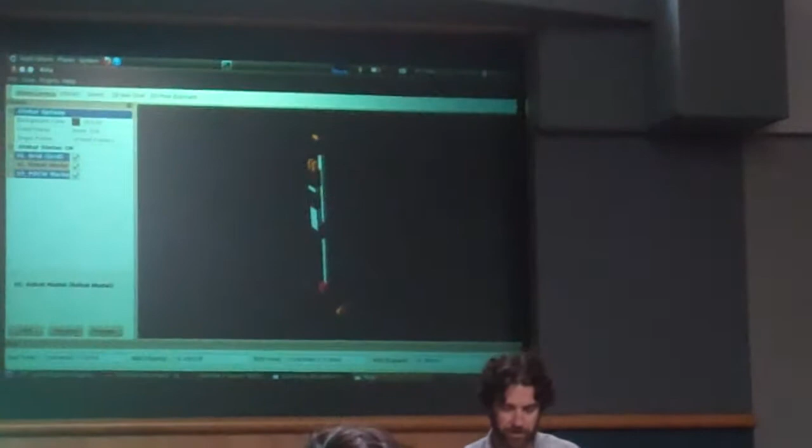So this is the actual wizard. We have our ornery turtle here. And so the first thing you'll see is we have easy and advanced. The advanced allows you to twiddle a lot more things, to set configuration at a much finer level, but today we're only going to go through the easy mode. If anybody's interested in what the advanced mode does, then I'm happy to talk about that offline.

So in the easy mode, I have to do one thing essentially, which is to say, what am I trying to navigate? What is the arm on this robot? Or what are the set of joints on this robot that I'm actually going to be trying to execute plans for? And generally speaking, for a mobile manipulator, this is going to come in the form of a kinematic chain. So the set of links and joints which is going to allow me to get my end effector somewhere in the world.

So I'm going to add a group kinematic chain here. We have our helpful little diagram describing the different things I'm going to set. This view actually allows me to navigate this tree structure of my robot. And I do need to know a little bit about what a kinematic chain is and why I'm setting this up, and in this case, we're not going to focus on that. I do know the right things to specify for this robot. I give my chain a name, and then I say accept.

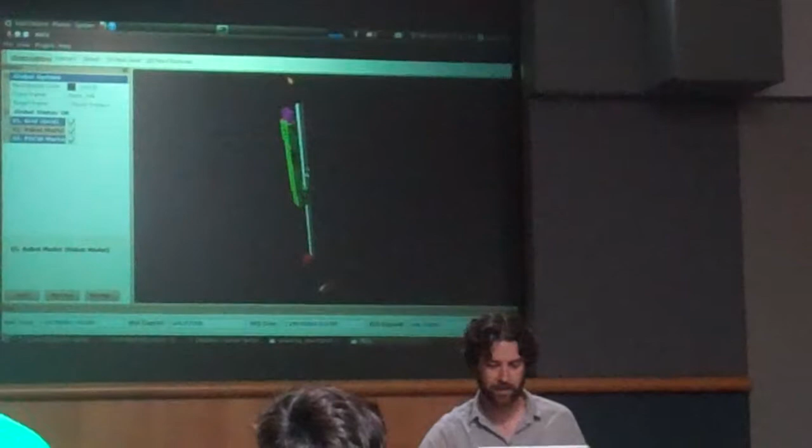And what this actually does is it brings up in RViz whatever I've set up. So we can see here that this is my arm. The green stuff is actually part of the kinematic chain, and the purple stuff is the end effector, so what I'm trying to get somewhere in the world so that I can pick something up. So we now have this visual confirmation that this is covering the entire arm, and it's not covering anything that's not in the arm. So with that done, I'm happy with that. And I can go back.

So that was pretty hard, but that's all I have to do. So now I'm going to select a directory to drop. So this is actually going to drop a full application in here when I generate a config file. It's doing a roscreate-pkg. It's putting together a whole bunch.

It's auto-generating a bunch of parameters. It's auto-generating roslaunch XML and all of that great stuff. I hit this button and we're done. So that was the easy mode of the wizard. So let's see what comes from that. So now I have ARM navigation configured for my robot apparently.

So I'm going to launch the second tool, which is called the Planning Components Visualization Wizard. So again, I now get Maxwell, but I also have a magic interact button. So what this allows me to do is I can now control my robot around using this interactive command. So in this mode, I'm in IK control mode.

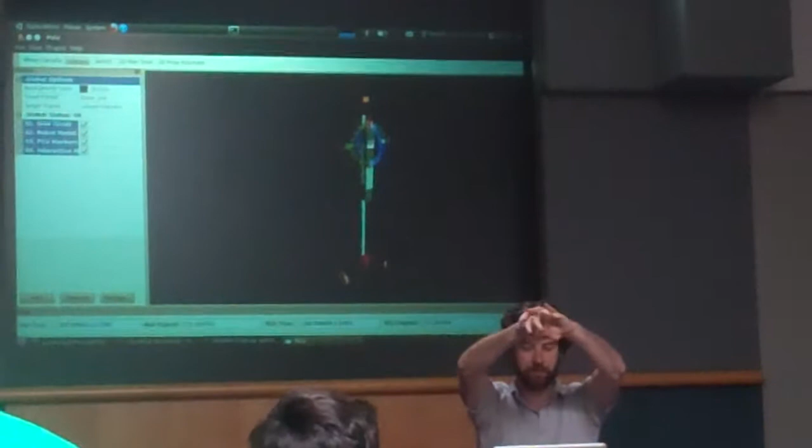So I'm going to be dragging around the sort of tip of my end effector, and this is going to be solving IK and then producing the joint angles that result from that. So if I don't have a valid IK solution, it will show up as red. So I'm just dragging this guy around, and it all just kind of works.

So Maxwell is a 5-DOF arm, so there's a lot of places I'm not going to be able to reach in IK. For instance, if I move it over to the right, I get into a bad region, but I can just go to the last good state and get back there. So this is the IK control mode, which got auto-configured and is running for free on my robot.

We also implemented a joint control mode. So when I do this, it brings up, so I get a control around each one of the degrees of freedom for my robot.

And these actually... Can you change the background color to like gray or something? Because the contrast is really bad. Yeah, thanks for the... Robots. Okay, thanks guys. If there's anything else, I'm looking at my much better screen.

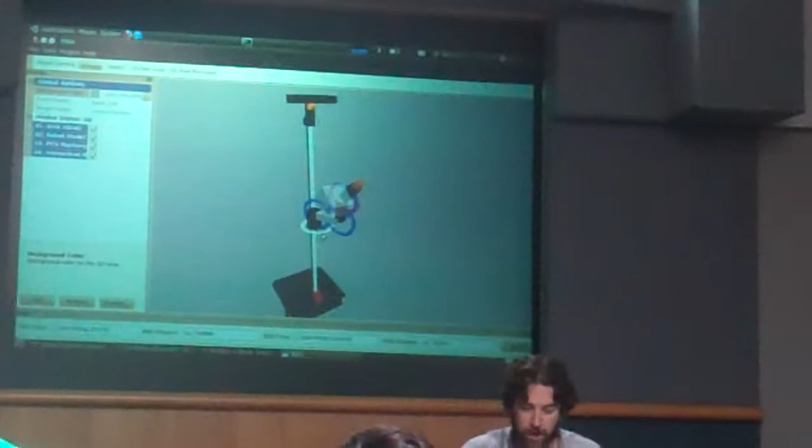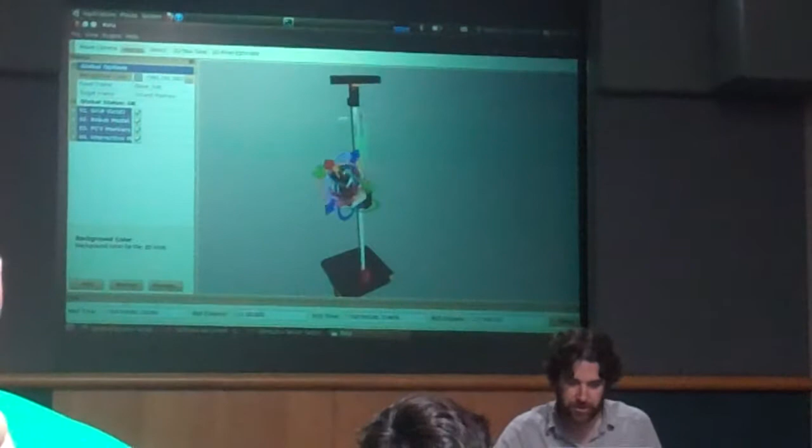So now I have each of these controls. And this control is respecting the joint limits, so I can't go past where you've told me that the joint can't physically go past. So I can get new positions there and move the robot in the world. So this is all great. So that was the end position. I can do the same thing for the start position.

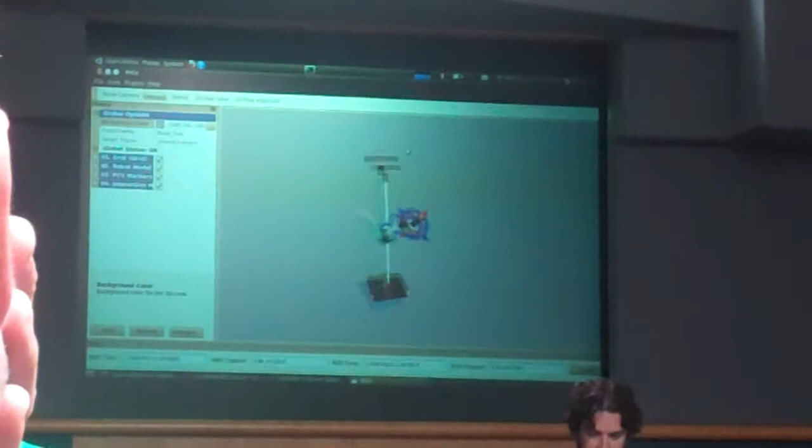And I can do a combination of IK and joint control. That also works fine. And now I have automatically configured the planner. So the little ghostly yellow figure is just going from point A to point B. And we've made it pretty easy on ourselves. So all that it's avoiding now is just going from point A to point B without hitting itself. But anything can do that.

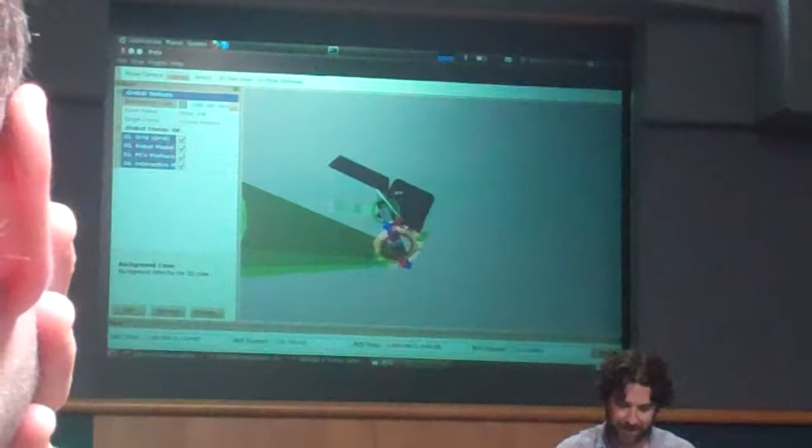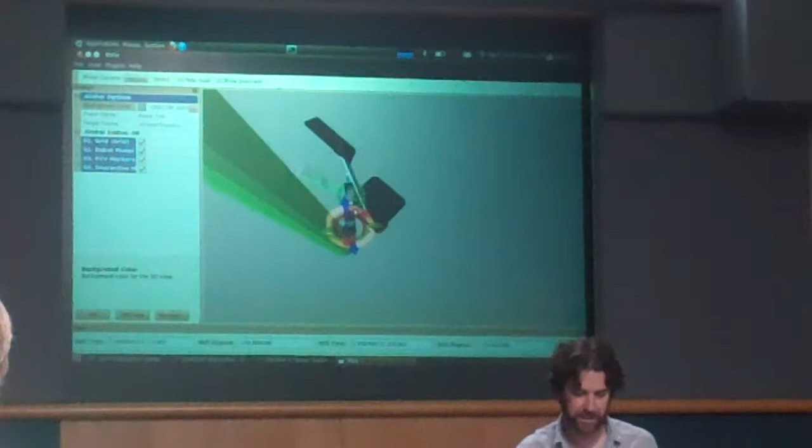So we can add a pole to the environment, and we'll drag this up into an inconvenient location, just to show that we can do this stuff too. So the back-end planner, OMPL, is a randomized sampling-based planner. It can occasionally do some kind of funky stuff, like that was maybe a little bit inefficient. I can also pass that resulting trajectory to a trajectory filter, which makes it smoother and potentially a little bit nicer.

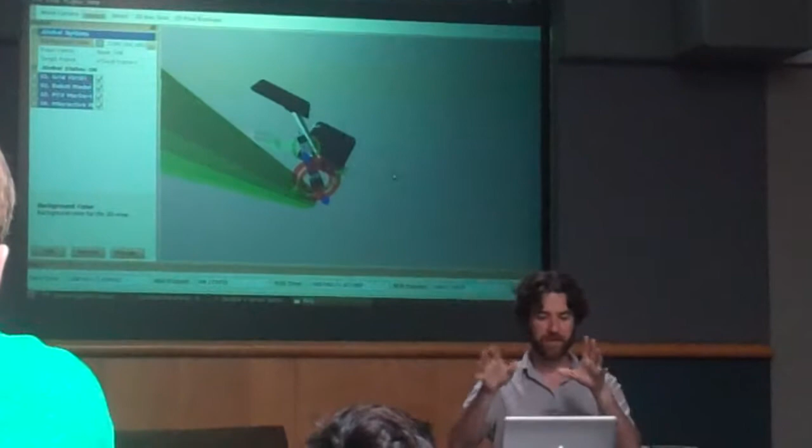Okay, so for my couple minutes of work and configuration, I get a planner, I get IK for any of the groups I've set up, I get a trajectory filter, and I can sort of explore my robot URDF. So it's great that that works for Maxwell with its blocky meshes.

I ran this on a bunch of different robots, all in easy mode, so not doing any of the advanced configuration. So this is TUM's Rosie, which we might have recently seen making a Bavarian breakfast, and which has the biggest, scariest hands in the entire world. So there should be a bad projection. So there are the big, scary hands, and now I configured this with both groups, so I can switch back and forth between the groups.

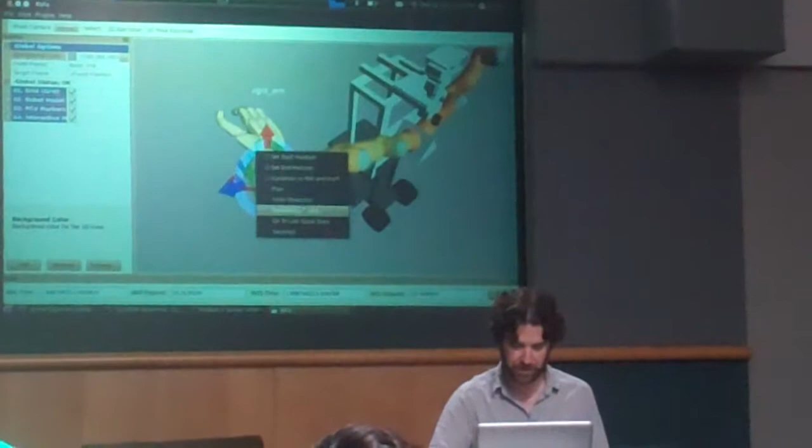There's a handy other feature where I can just randomly perturb this and get a reasonable start state. So again, I can now solve IK, and plan, and filter, and so on.

So this is showing the planning components. It still isn't all the way to getting your robot to actually avoid real stuff that it sensed in the environment, and it's not hooked up to a simulator, so you still need to do the work of actually writing the controllers and all of that. But in terms of ARM navigation, this should be at least a baseline of everything you need to do.

So this is almost to the point where this can do what PR2 ARM navigation can do, and you didn't need to know about the nitty-gritty. And if you do want to learn about the nitty-gritty, you now have a full set of launch files. And if you want to twiddle parameters, then at least you know now what parameters to twiddle and what components you can swap out to get a little bit better performance for particular things. So this will all go out in E-Turtle, we hope, and I hope that this means that many more mobile manipulators start using our software.